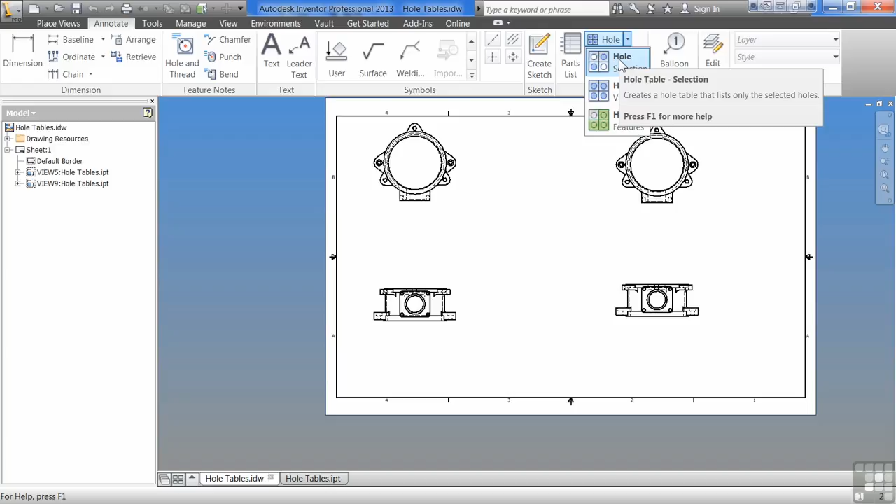In this exercise, we're going to be discussing hole tables. Hole tables are a different way to label out your holes, and it's very easy and simple to use. We come over to the table panel, and we select the hole selection tab to start with. And it'll come up and it'll ask us to select a view, and then it'll ask us to place the origin, and then it wants you to go through and select all the holes that you want to identify.

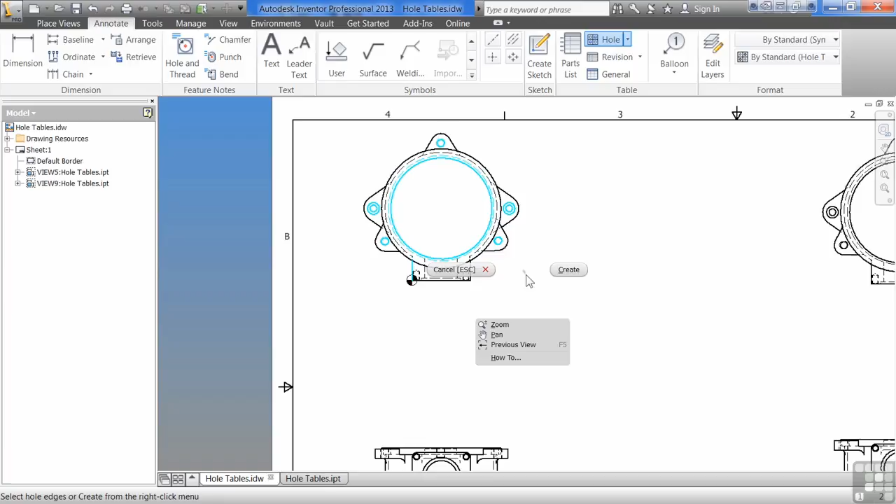See, we could actually select the counterbore and countersink, threads, and the actual hole. Everything that's in that view, we right click, we say create, and we drop it in there. You'll notice that it automatically tags all the holes for us, and we can even come in here, select the tag, and drag it off to get it out of the way. That's a little hard to see in there. It's a very busy drawing.

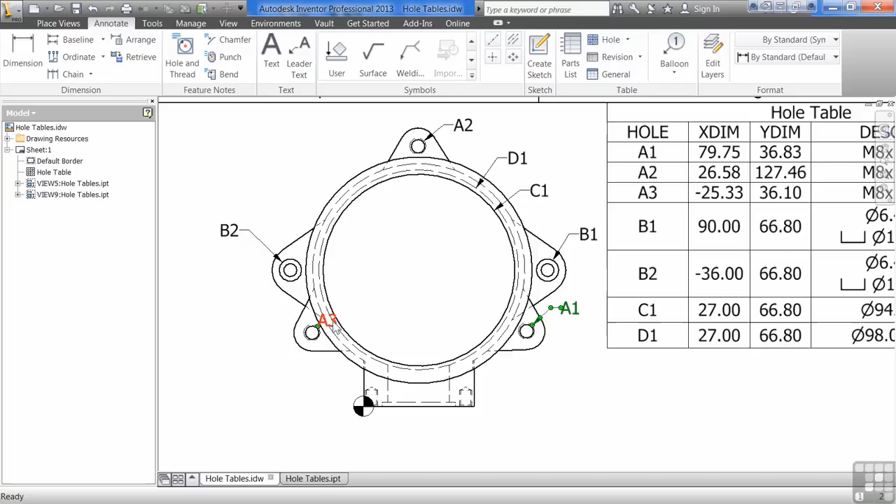So now that we have our hole and thread notes where we can see them, you could reference them back to this table. If we have the origin in the wrong location, you can just grab it and move it. You'll notice as you move it, the table automatically updates. So depending on where you want to put your origin, it goes through and modifies it for you and keeps the table up to date appropriately.

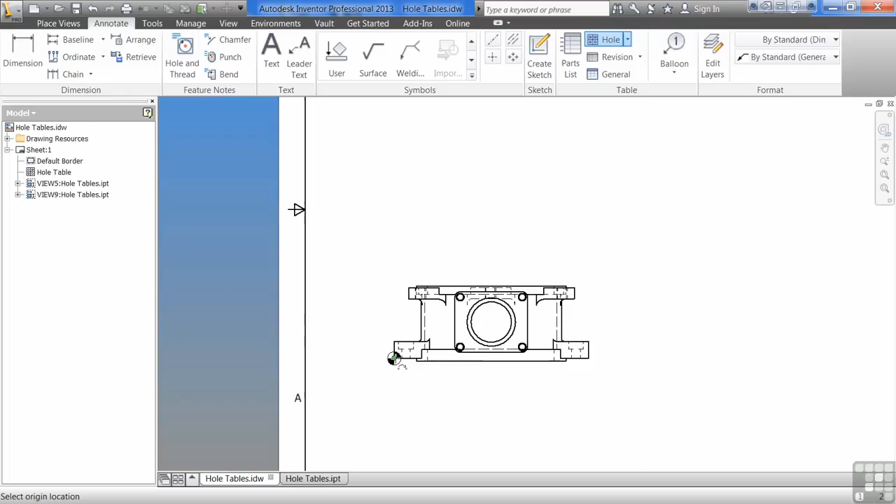The next option is the hole view. Works similar to the hole selection, but instead of you manually going through and picking all the holes, it gives you all of the holes in that view. So you very easily grab everything and go.

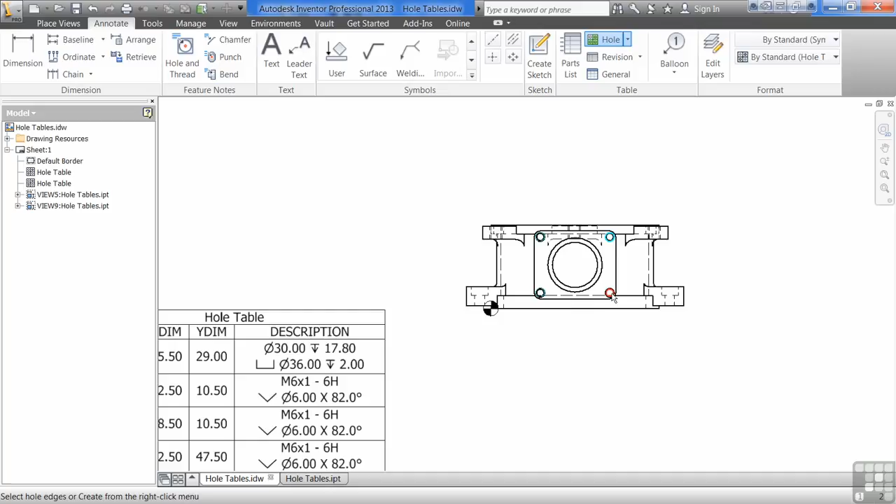And then the last option is hole features. We're going to drop our origin as we did before. And then we're going to pick a hole. Right click and say create. And basically it'll give you all the related holes there. I'll undo that one so you can see it one more time here. Hole feature.

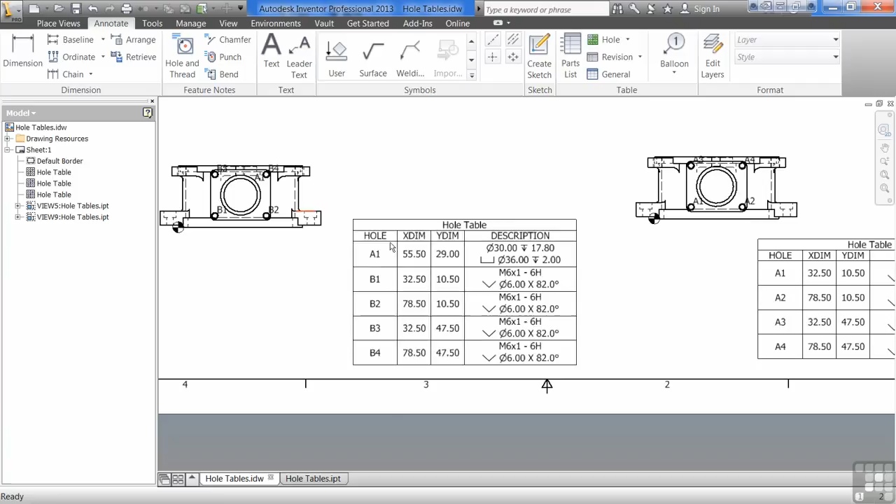So I can either pick all of the holes or I could just pick one in the pattern and it'll give me everything in that pattern. So you can see it left out the A. In this case, this is the A, which was the center hole, but it got all the holes that are related to each other. Basically, they were all created with the same pattern or the same size, so it understands that they're all the exact same hole.

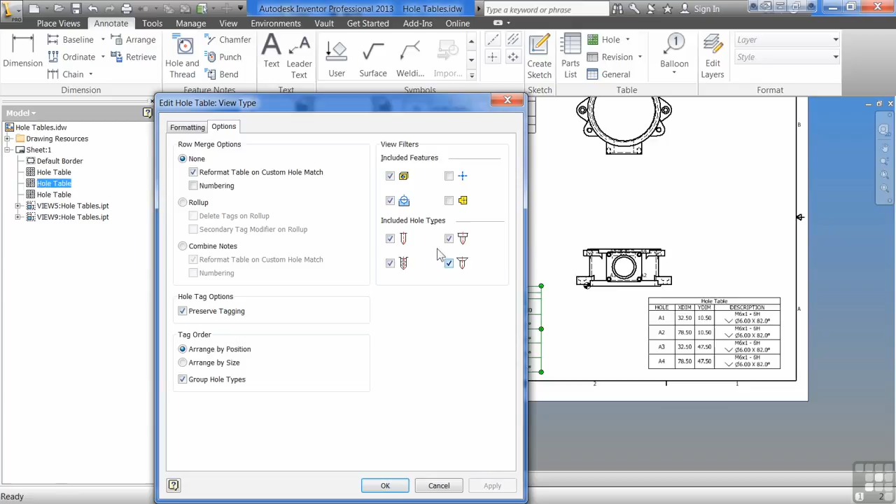We have the ability to come in here and edit the hole table. We can do things like edit precision. We can resort the table, we can add holes, we can remove holes, we can look at the visibility, and I can just say edit hole table, and we get all of our options. We can say arrange by size, arrange by position, we can actually combine notes, we can roll up notes.

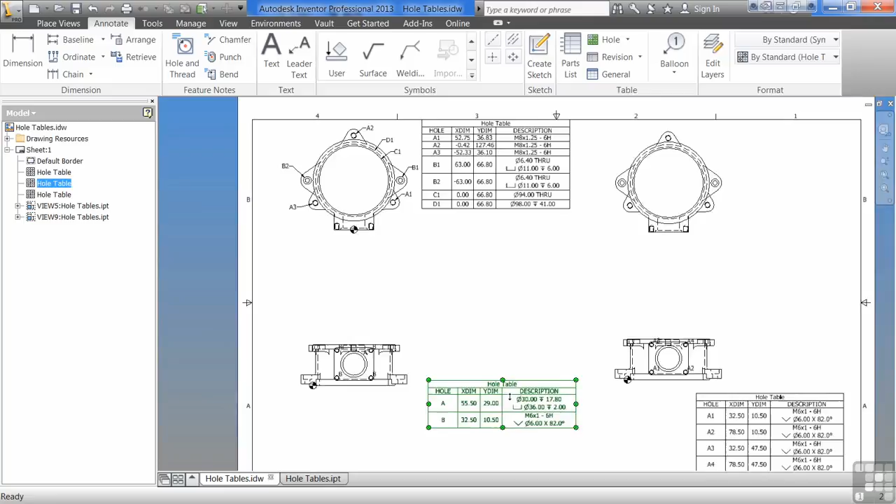If you say roll up, you hit OK. And then what it does is it says, okay, these are all B's. They're all the exact same hole, so there's no sense in having multiple notes. So I can do the same thing up here. Right click, say edit hole table. You can say combine them. And what it does is it combines the ones that have the same description, but it gives you the locations of all the different ones.

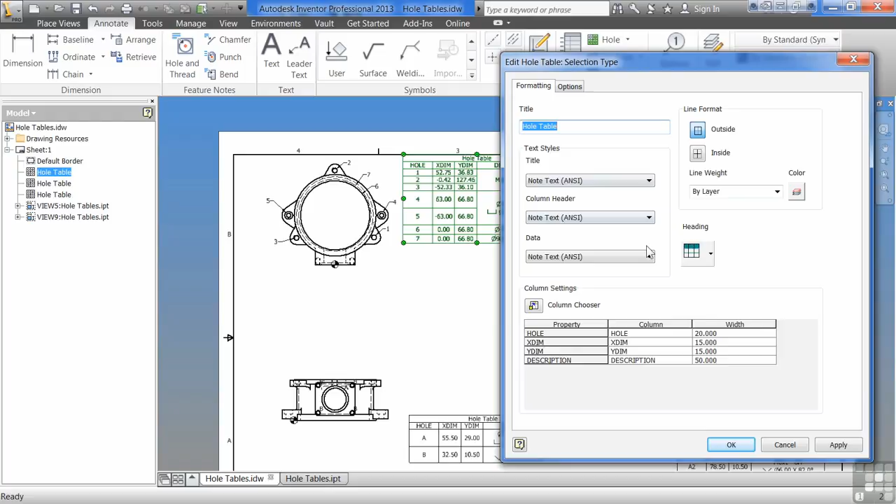So we have a lot of options in here. Combine numbering: change it over to where instead of being A, B, and C, it'll be 1, 2, 3. Same if we disabled the merge. We also have formatting options where we can change what information is in the table. We want the table to go down or up. We can actually adjust the line weights and the text styles inside of the table. We can add additional columns if we want. And then we could actually include filters for what holes we want to see.

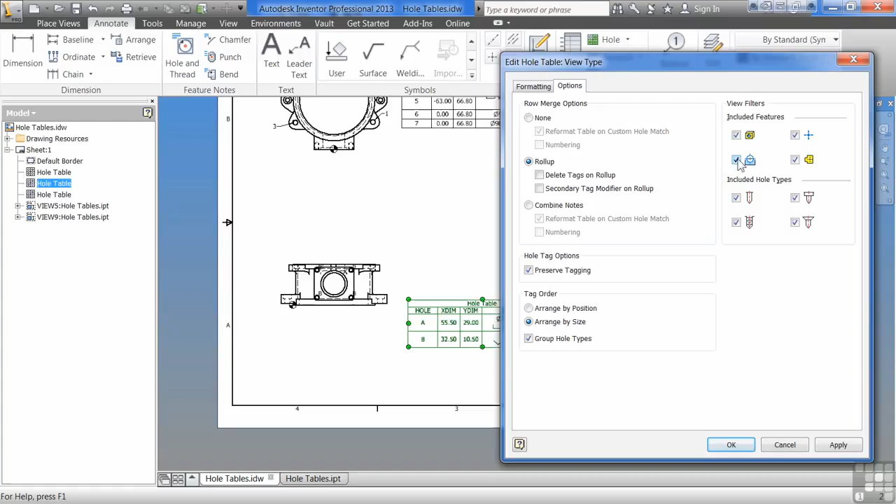So if I come in here and I edit this hole table, where I'm rolling this up, I could say, include center marks and punch centers, and don't include hole features, but do include circular cuts, or don't include circular cuts, but do include hole features. So I have the ability to come in here and tweak these tables and get a lot of information in a very small space. If you're used to seeing hole and thread notes, you can make this look like your company standard. It's not hard to do.

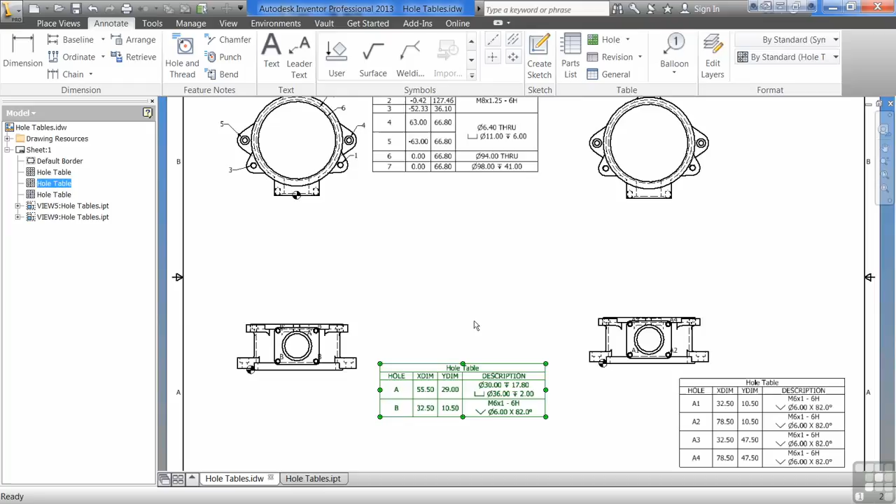We can go through and use these styles and modify these hole tables and get exactly what you're used to seeing or what your guys out on the floor are used to seeing, and see how easy it is to use. So go through here and add one of each of the hole tables to this drawing, see the different types, and then come in here and edit the hole table and look at the roll up. The row merge is probably the most used, so you can decide if you want to roll it up or combine notes, and look at what happens whenever you do. So play with it, see what you can do, have some fun with it.